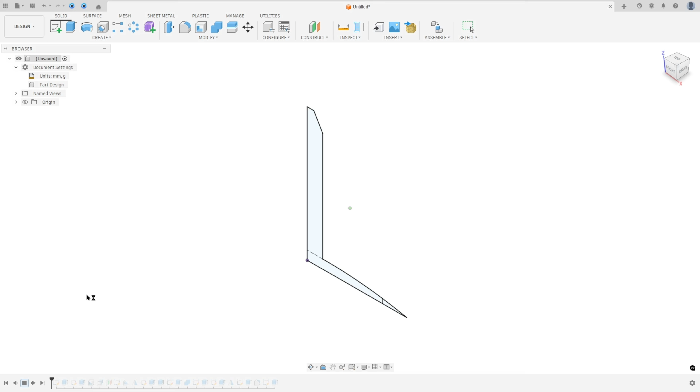Let's try one more challenge in Autodesk Fusion. In this video, you'll learn to use the Extrude, Shell, Press Pull, Offset Plane, Rib, Mirror, Combine, and Fillet. So open Fusion and let's go.

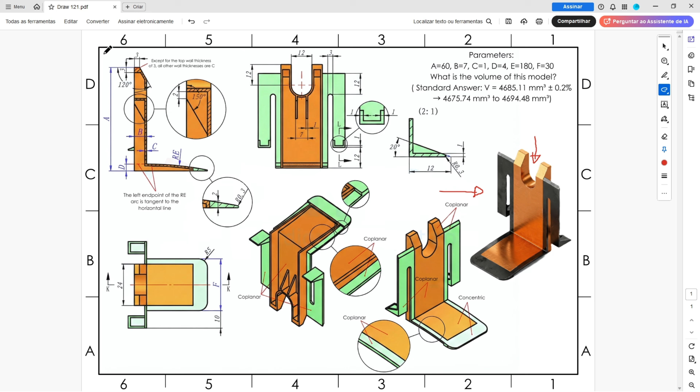The first step to create this part, we will make the orange body. So we will select the front plane and make this sketch. And here will be the midpoint. The first thing we'll make is this line here. Letter A, 60 millimeters of length. Create this line with 3 millimeters and create this line. The angle between this line and this line is 120 degrees.

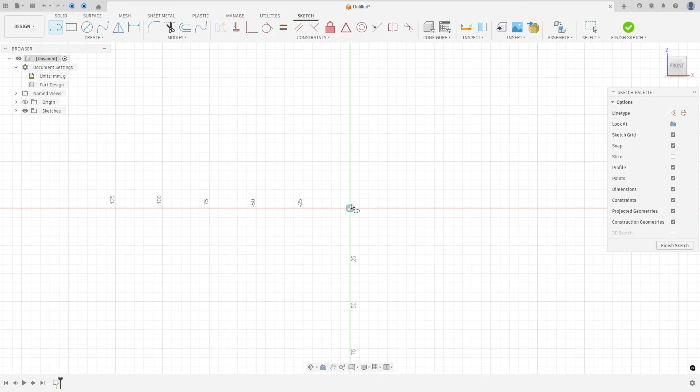So open Fusion, go to create a sketch, select the front plane, select a line, click here in the midpoint, 60 millimeters of length, 3 millimeters here, and make a line here. The angle here 120 degrees, and press OK. Let me move the dimensions here a little bit.

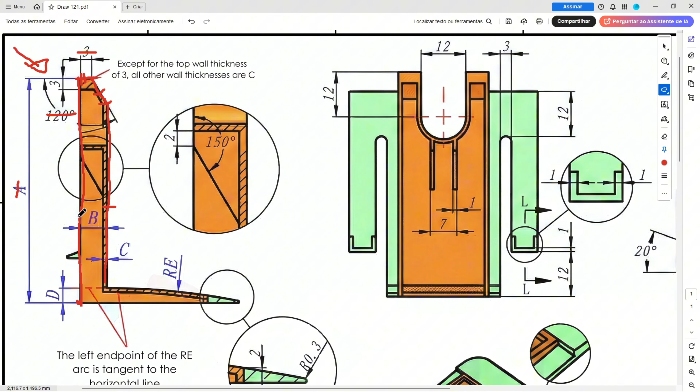And now we will create this line. The distance between this line and this one is letter B. It is 7 millimeters. So select a line, click here, make a line here. And go to sketch dimension, the distance here, 7 millimeters.

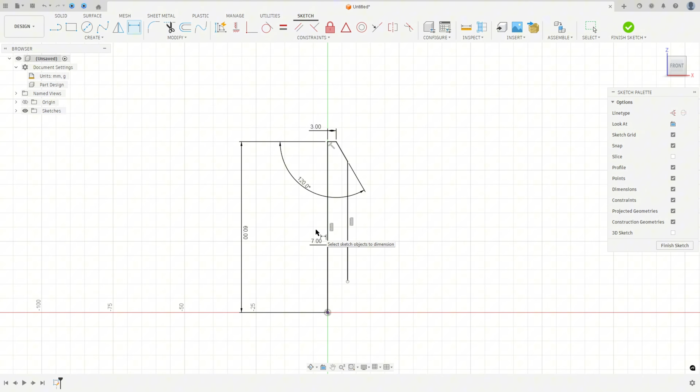And now we will create this construction line. The distance between this construction line and the midpoint is letter D. It is 4 millimeters. So select a line, a construction line, click here in this point and in this line, and go to sketch dimension. The distance here, 4 millimeters, and press OK.

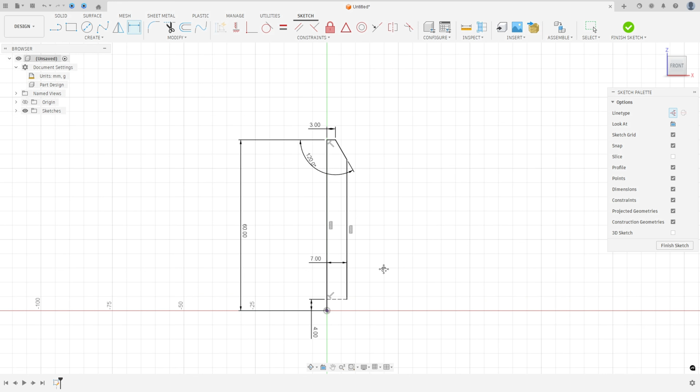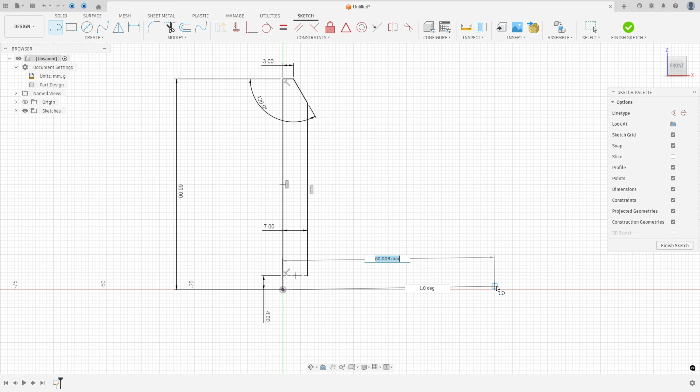And now we will create this line here, and we will create this arc. This arc is tangent with this line and coincident with this line here. So select a line, click here in this point, remove the construction line type, make a line here, and go to create, select arc, 3-point arc, click here in this point, click here in this point, make an arc here. This arc must be tangent with this line.

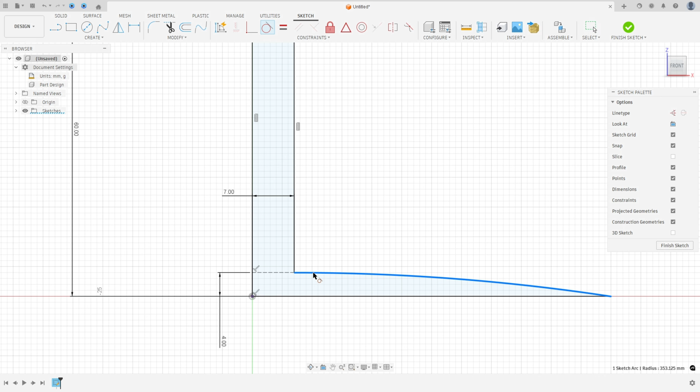If your arc is not tangent, go to constraint, select tangent, select the arc, and select this line. Okay? And go to sketch dimension. The radius here is 180 millimeters. And press OK. We made this profile here.

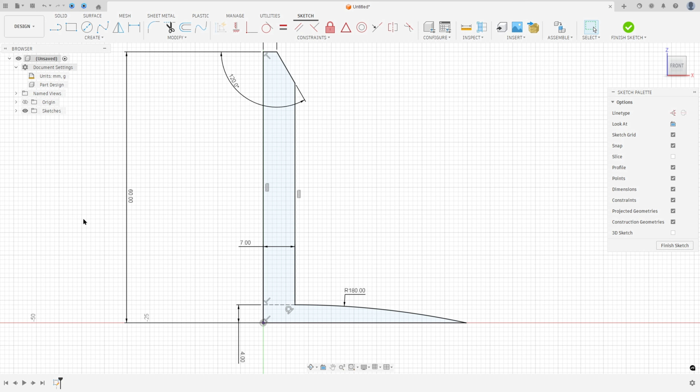But here, we needed to create this line. Look at this detail here. We will create this line with 2 millimeters because the orange body doesn't have this area. Okay? So select line, click on this line and click on this arc. Go to sketch dimension. The distance here, 2 millimeters. We made this profile here.

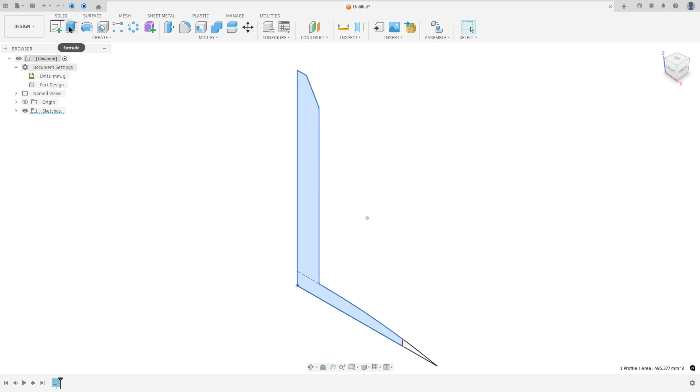So finish the sketch. We need to extrude this profile 24 millimeters. So go to extrude, select this profile. Make sure to not select this area. And the direction, select symmetric. Measurement, whole length, and the distance here, 24 millimeters. Operation new body and press OK.

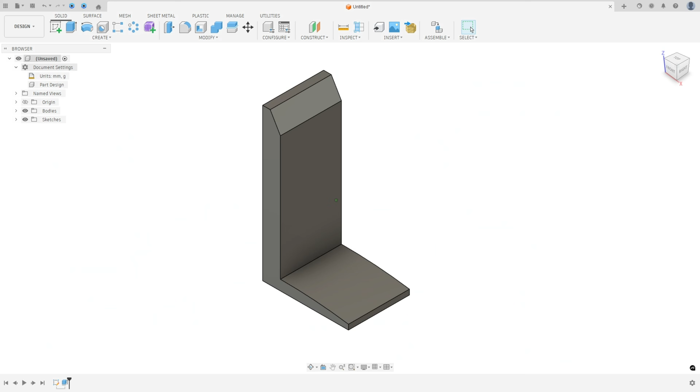And now we will create this cut here. It is a slot, 12 millimeters here. And the distance between this edge and the center of the slot is 12 millimeters. So let's create this sketch. Go to create a sketch and select this face here. Go to create, select project, include, project, selection filter, body, select this body and press OK.

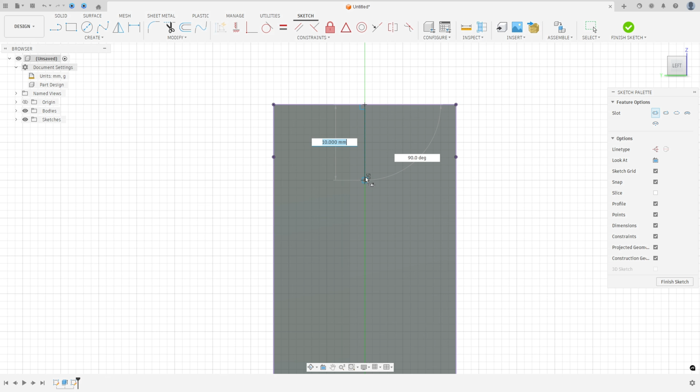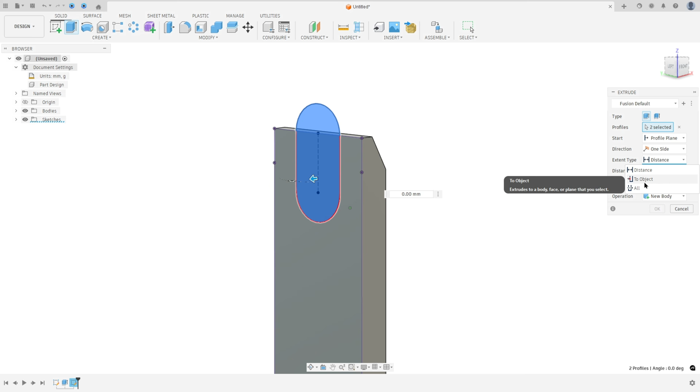And go to create, select slot, center to center slot. Click here in this point and make a slot here. Go to sketch dimension, the distance here 12 millimeters, and the diameter here is 12 millimeters. Now finish the sketch and go to Extrude, select this profile, and the extent type, select all and flip the direction, operation cut, and press OK. We made this one.

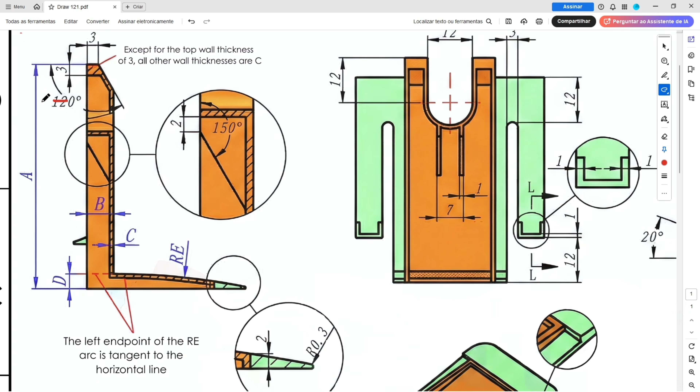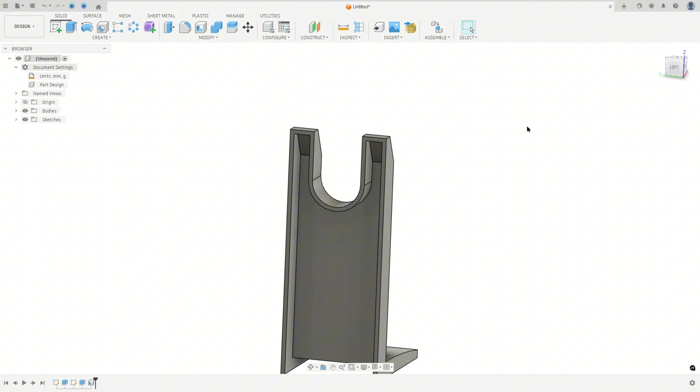And now we will shell this body. The thickness of this body is letter C. It is 1 millimeter. Except for this area, all the thickness is 1 millimeter, okay? So go to shell, select the faces that we will remove, this face and this face here. The thickness here 1 millimeter, and press OK. Just to check the dimension here, this face and this face, 1 millimeter, but here is 3 millimeters.

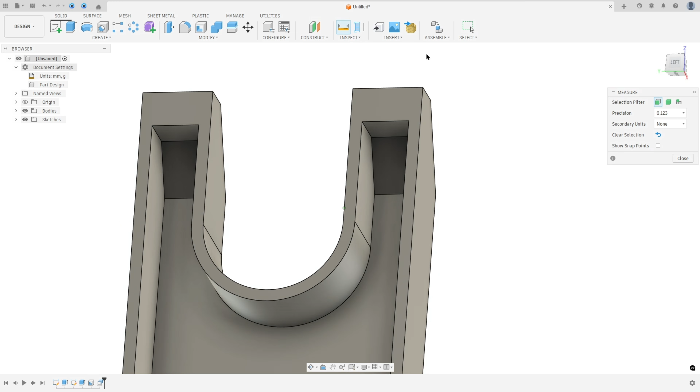So to create this, go to modify and select press pull and select this face and this face. The distance here 2 millimeters, and press OK. Just check the dimension, go to measure, select this face and this face. The distance here must be 3 millimeters on both sides, okay? 3 millimeters, and okay.

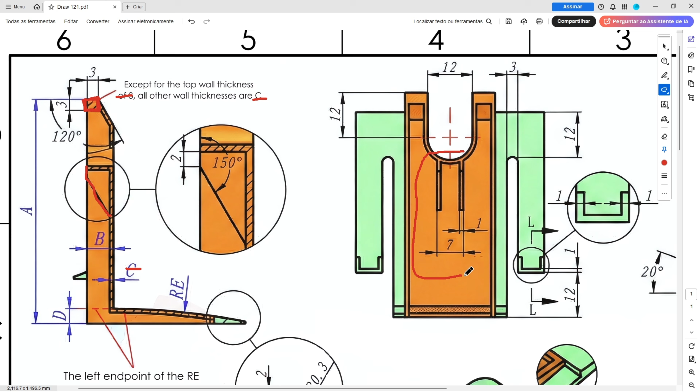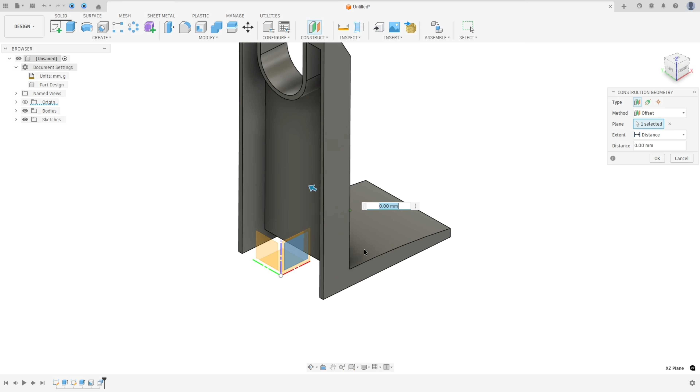And now we will create this rib here. To create this rib, we have the sketch here, okay? We will create a plane at this line. We know the distance between this edge and this edge is 7 millimeters, minus 1 and minus 1 of the thickness. The distance here is 5 millimeters. So we will create an offset plane from the right plane, 2.5 millimeters, okay? So go to offset plane, select the right plane, the distance 2.5 millimeters, and press OK.

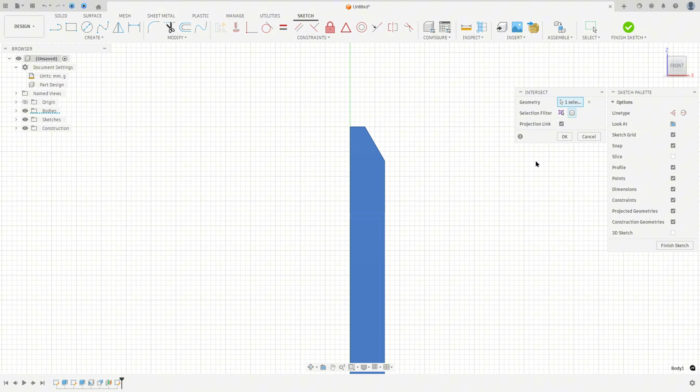And go to create a sketch and select this new plane. Go to create, select project include, intersect, selection filter, select the body, select this body here, and press OK. I will hide this body a little bit.

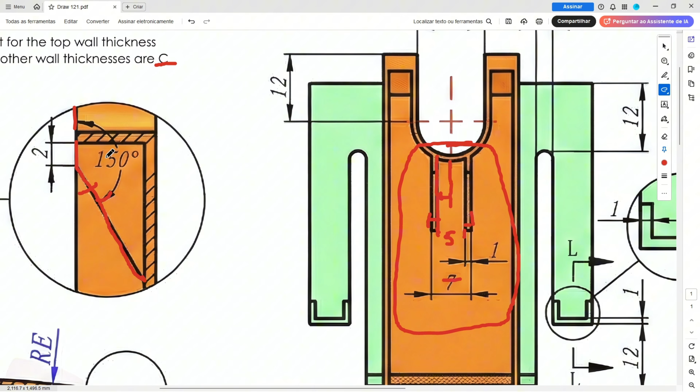And here we will create this profile, a line here with 2 millimeters of length and another line here. And the angle between this line and this one is 150 degrees. So select line, click here in this point, make a line with 2 millimeters and create another line here. And the angle here is 150 degrees.

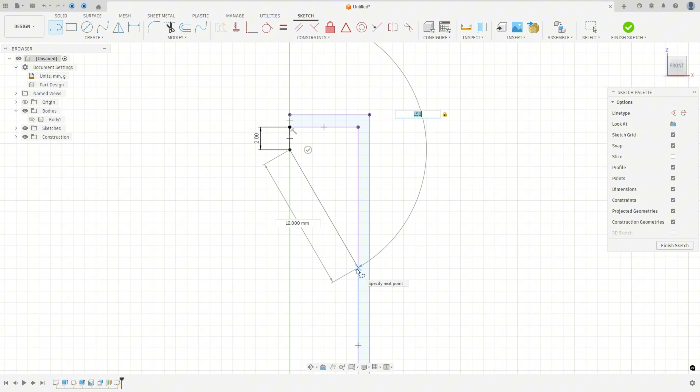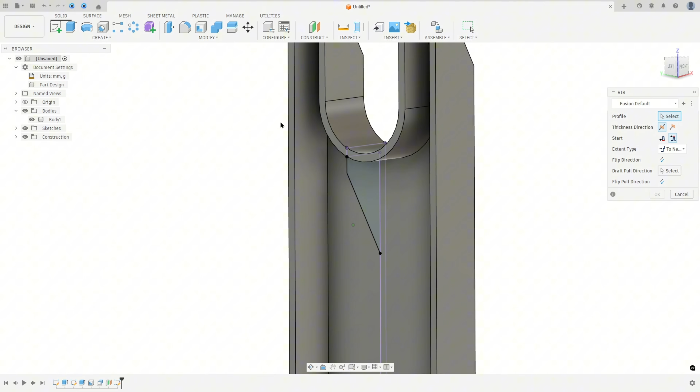And make this line coincident with this one. We made this profile. So finish the sketch. Show the body one here. And here the thickness of this rib is 1 millimeter. So go to create and select rib. Select this profile, 1 millimeter. But here the thickness direction, select one side. It must be to this side, okay?

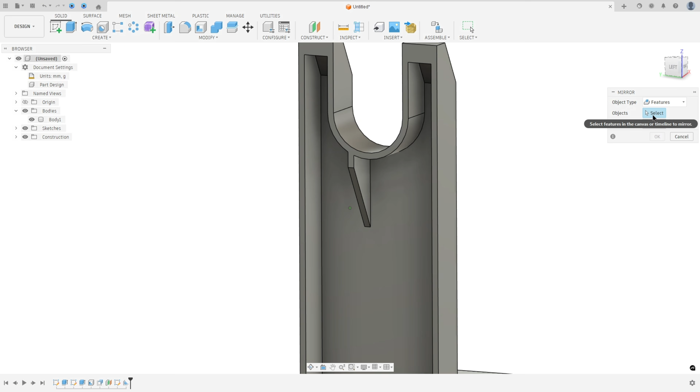And press OK. And now to create the other one, go to create, select mirror. And the object type, select features. The object, select this rib. And the mirror plane, select the right plane. And press OK. Go to inspect, select measure. Select this face and this face. The distance here must be 7 millimeters. And the distance inside here, 5 millimeters. Okay.

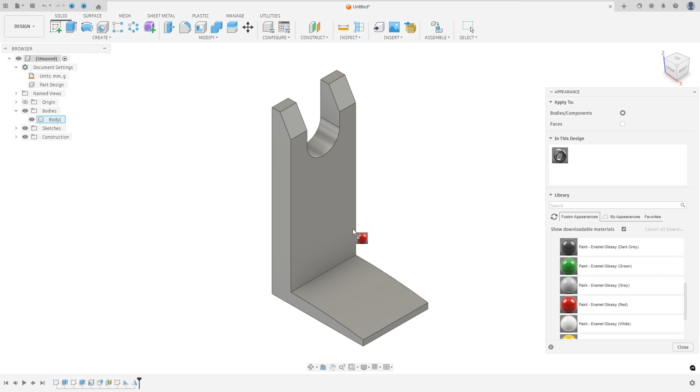And now press letter A on the keyboard. We will change the color here. So go to paint, enamel glossy, select red here, move this to this body. Double click here on this color, change the color. Make this orange. Okay.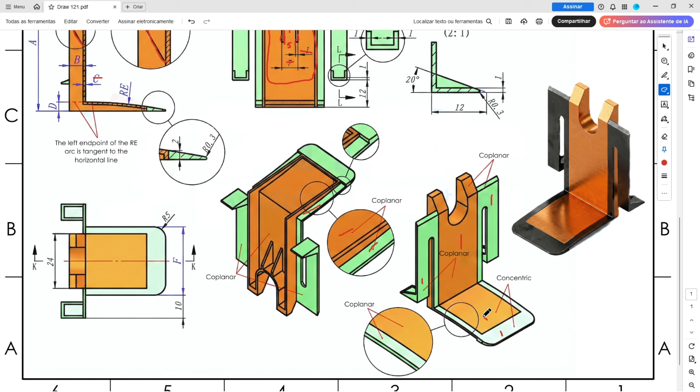And now we will create the body 2. And the body 2, look that it is coplanar with the body one, the face is okay. And here is concentric, the same arc. So we will create this sketch here. And we know that the wall thickness is 1 millimeter. So to create this, go to create sketch and select this face here.

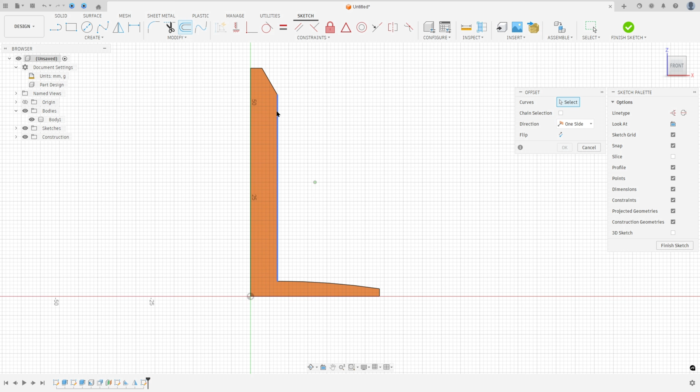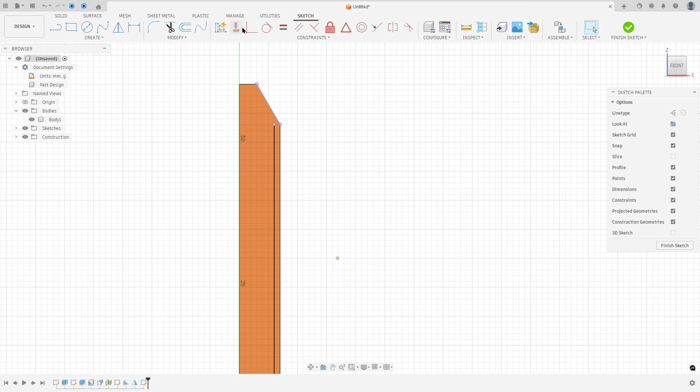And here, go to offset, remove the chain selection, select this line and select this arc, minus 1 millimeter, the thickness of the body, and press OK. And go to create, select project, include, project, selection filter, select specified entity, select this edge here and press OK. And go to constraint, select coincident, select this line and this one.

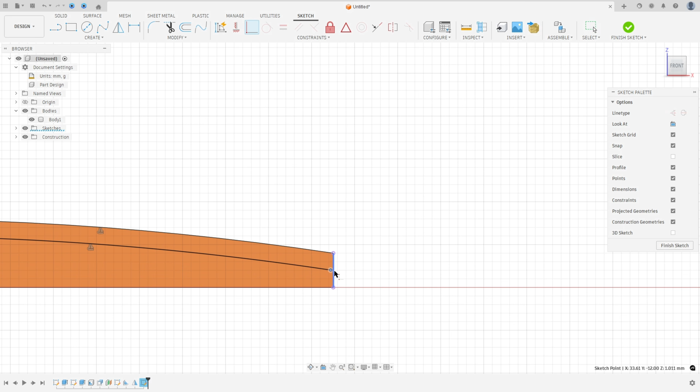And here we will make a project of this face. Press letter P on the keyboard, select this edge here and press OK. Make this point coincident with this edge. And here we will create the arc of the sketch 1. Okay, you can take a project here too, no problem. And press OK. Hide the sketch 1. We have this profile.

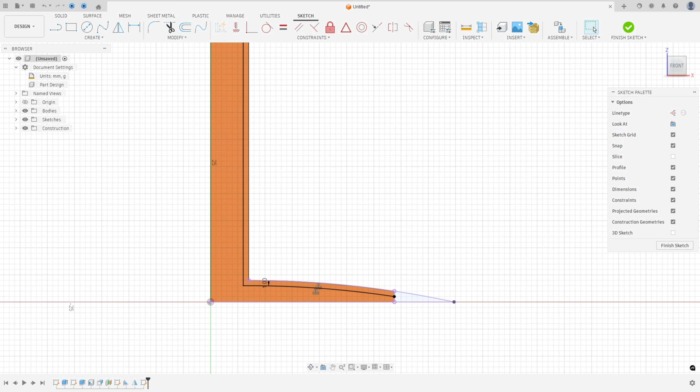And here we'll make a line. And this line will be here. And the distance between this line and the midpoint here is 12 millimeters. So select line, make a line here, go to sketch dimension. The distance between this line and the midpoint is 12 millimeters. We have this profile, this area, and this area here.

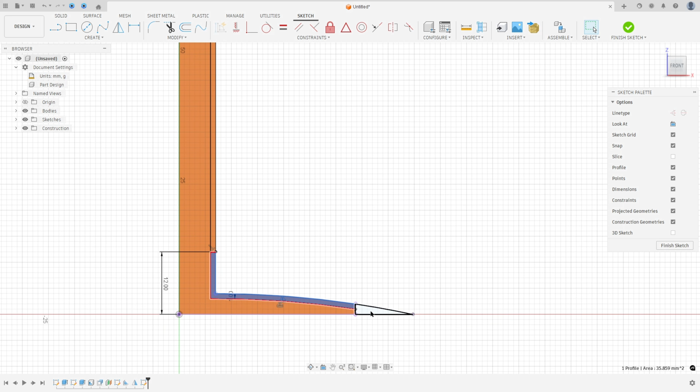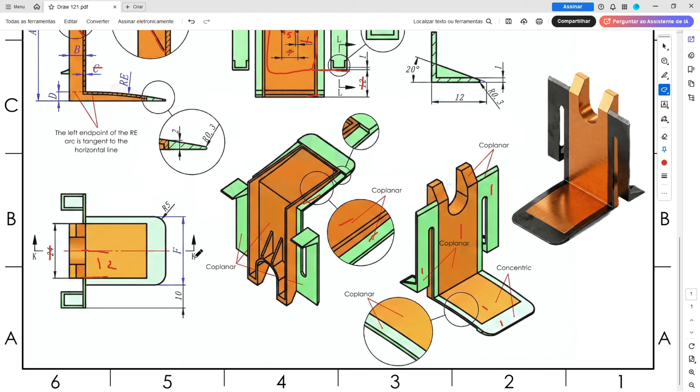And now finish the sketch and go to extrude, select this area here, this area. The operation here will be new body, and the distance here will be 24/2. The distance between this line and this line here is 12 millimeters. The letter F is 30 millimeters, so the distance between this edge, this line, and this edge is 15 millimeters.

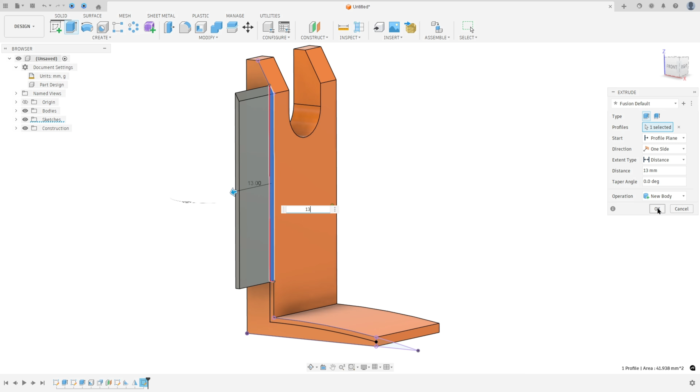So we have 3 millimeters, the distance between this edge here and this one, 15 minus 12. And the distance between this line here and this edge is 10 millimeters. So we will extrude this 13 millimeters, okay? The distance between this edge here and this one. So the distance here, 13 millimeters, operation new body, and press OK. And show the sketch 4 again.

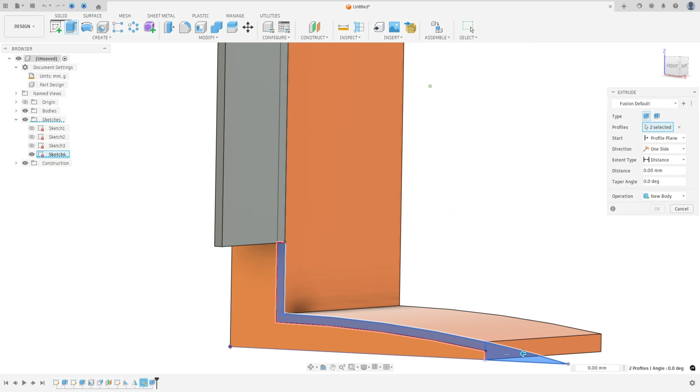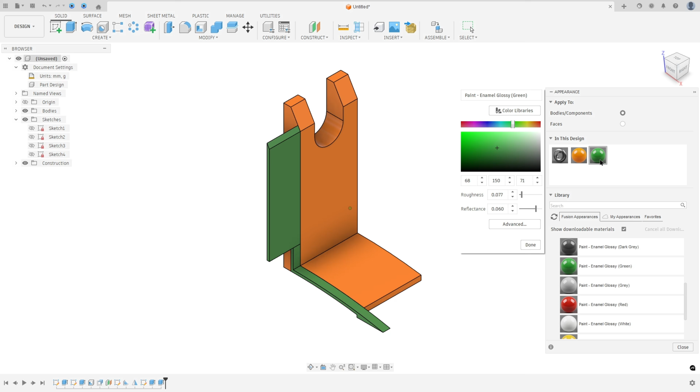Go to extrude and select this area and this one. And the distance here will be 3 millimeters, the distance between this line and this one. The distance here, 3 millimeters, okay? The operation here, new body. And press OK. Hide the sketch 4. Made this one. Press letter A on the keyboard, change the color here. Make this green. Okay.

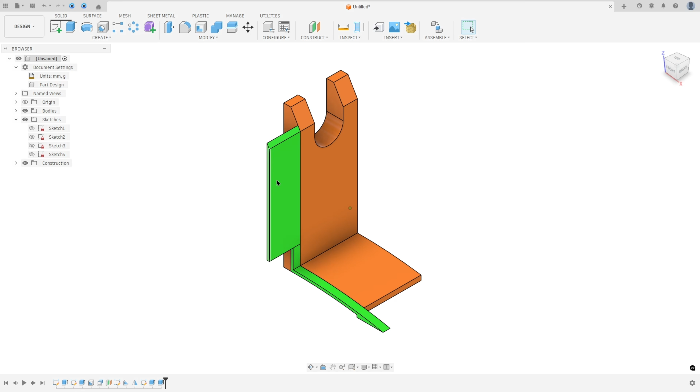And now we will create this cut here. So this cut is a slot. The diameter here is 3 millimeters. The distance between the tangent point here and this edge is 12 millimeters. And this line here is collinear with this face. Okay. So select this face and go to create sketch.

And here go to create, select slot, center to center slot, make a slot here, go to sketch dimension. The radius here is 1.5 millimeters. The distance here, just to check the dimension, 3 millimeters, okay, the diameter.

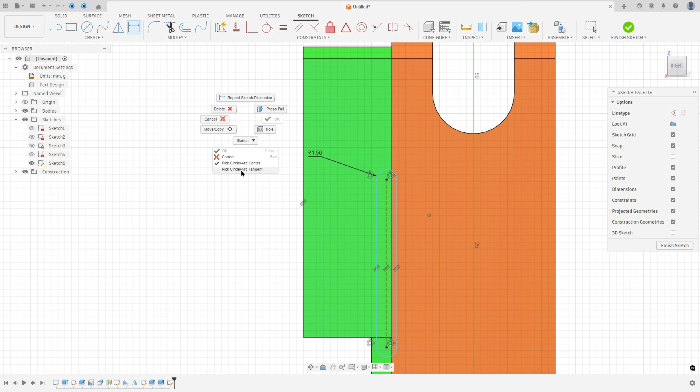And go to dimension, click with the right button and select pick circle arc tangent, select this arc here and select this edge here, or select this edge first and click with the right button, select pick circle arc tangent, select this arc here, the distance here 12 millimeters. And let me move the dimension here a little bit.

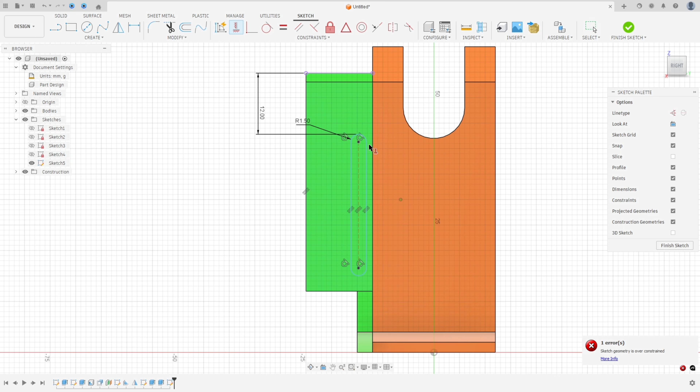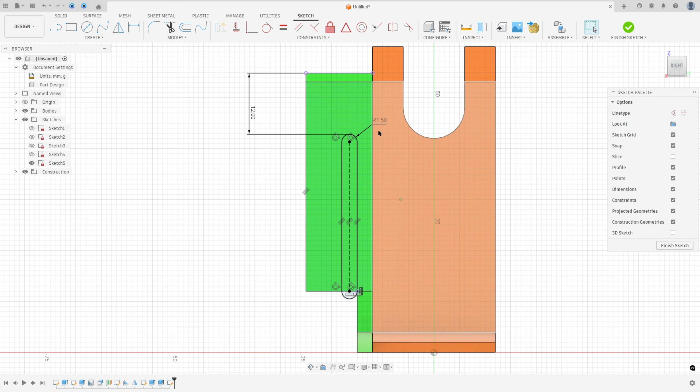And here go to constraints and select horizontal/vertical, select this point and this point here. No, sorry. So go to horizontal/vertical, select this point and this point here, okay? And make this horizontal/vertical here. We made this profile. So finish the sketch, go to extrude, select this slot here. The extent type, select all, flip the direction, operation cut, and press OK.

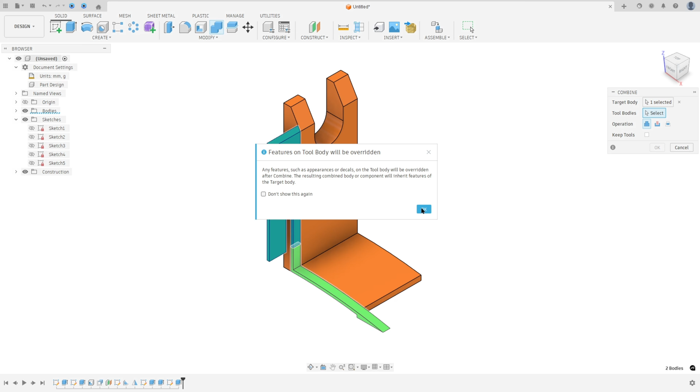Now go to modify, select combine, select this body and this one, press OK. Operation here, join, and press OK. Look that we have the body 1 and body 2 here, okay?

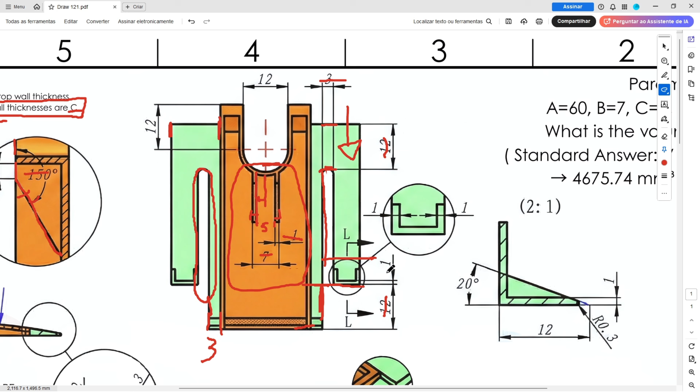And now in this body here, in body 2, we will create this sketch. We'll make this triangle, 12 millimeters, and the angle here 20 degrees.

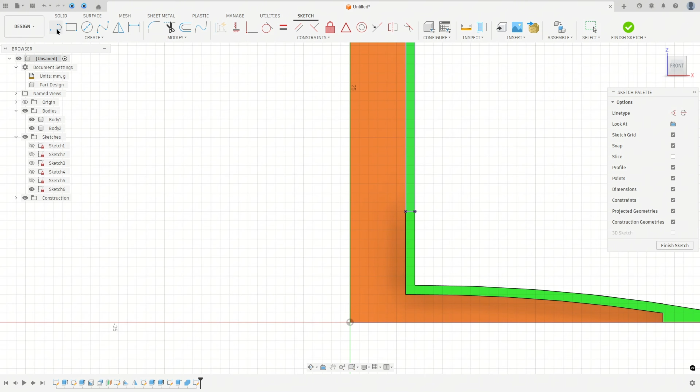Go to create a sketch and select this face here. Press letter P on the keyboard, select this face, and press OK. Select line, make a line from this point here with 12 millimeters, and make the triangle here.

The angle is 20 degrees. Make sure that this point here is coincident with this line. And in the corner here, we have an arc with 0.3 millimeters of radius. Go to fillet, make a fillet here, 0.3 millimeters, and press OK.

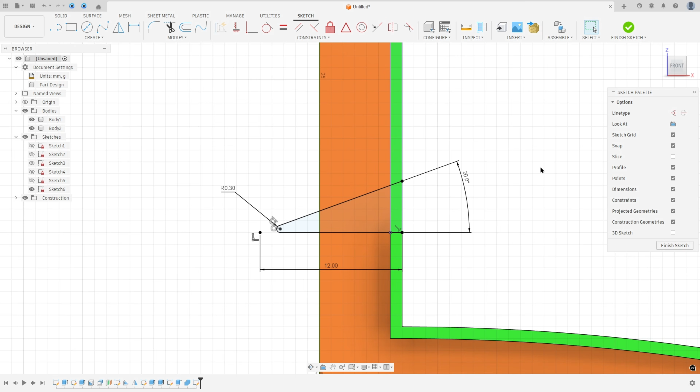We made this profile, so finish the sketch. Go to extrude, select this profile here, the extent type select to object, and the object select this face. Operation join, press OK.

Now we need to create a cut in this area. To create this cut, we'll make a rectangle. The distance between this rectangle and this edge is 1 millimeter on this side, and in the bottom is 1 millimeter, okay?

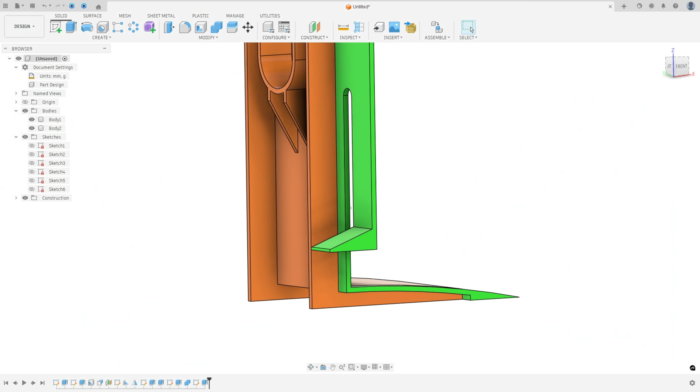Go to create a sketch and select this face. Go to create, select project include, project, and select this face, or select this body, okay? The body 2, and press OK.

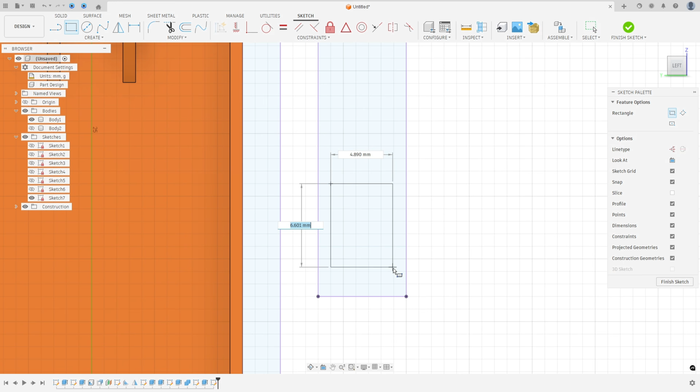I will hide this body a little bit and go to 2-point rectangle, make a rectangle here. Go to sketch dimension: the distance here 1 millimeter, the distance here 1 millimeter, the distance here 1 millimeter. And here just to fully constrain this sketch, we use 10 millimeters here, okay?

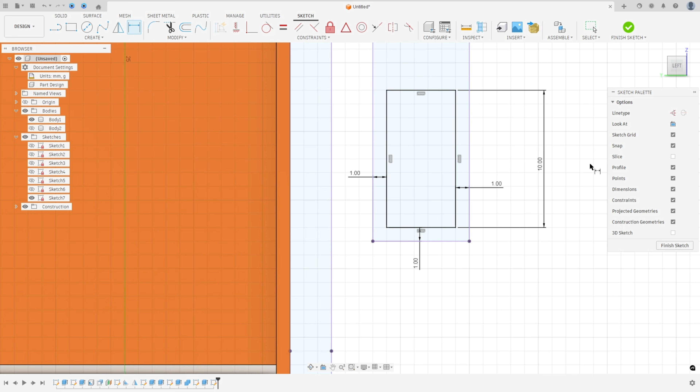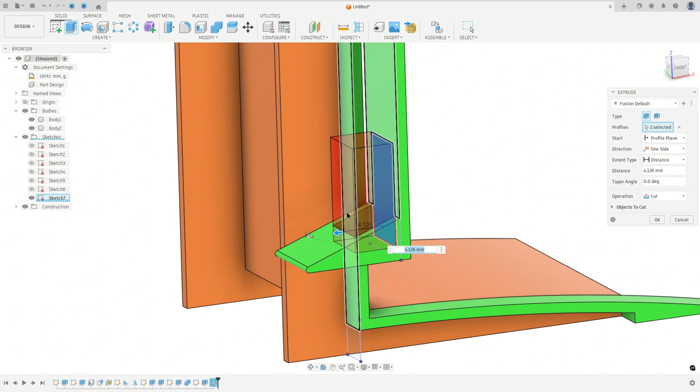Finish the sketch, go to extrude, select this rectangle, show body 2. We will make a cut here, so the extent type select all, flip the direction... we don't need to flip. It's not working with this extent type, so select distance and move this 15 millimeters. Operation cut, press OK. We made this cut here, okay.

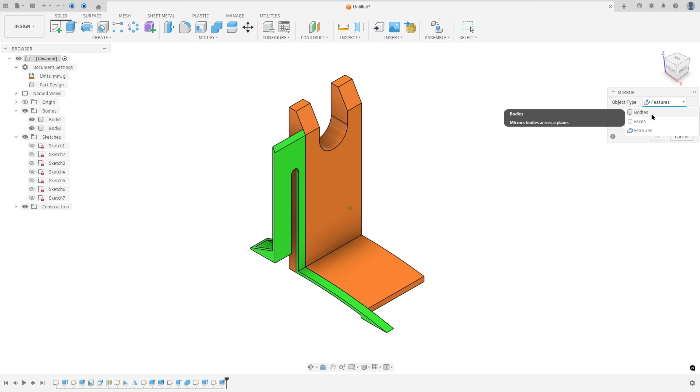And now we will create this body on the other side. Go to create and select mirror. The object type, select the body, select this body here. The mirror plane, select the front plane, operation new body, and press OK.

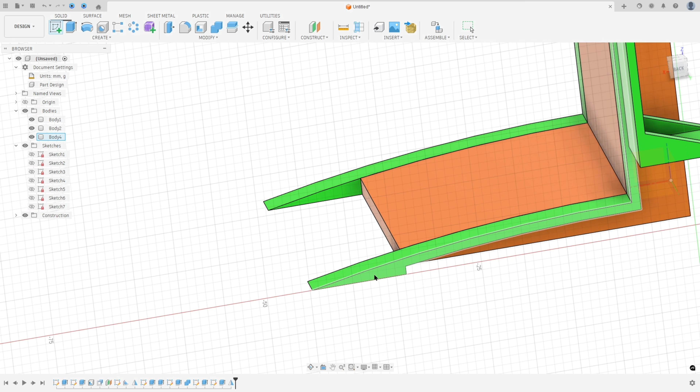Now we'll make an extrusion to create this area. Go to create a sketch and select this face here or this face here. Go to create, select Project/Include, Project, select this face, and press OK. And select a line, click here at this point, make a line here coincident with this arc.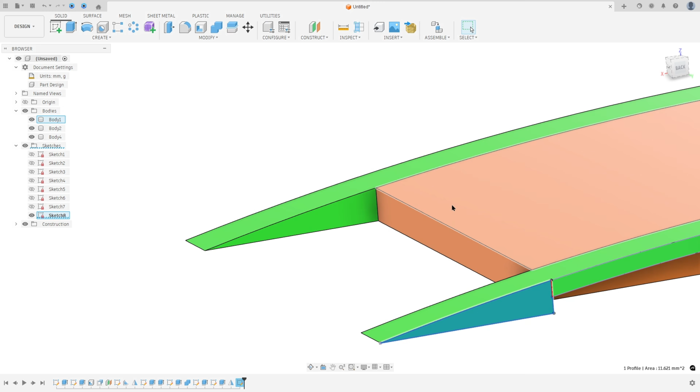So we have this profile, finish the sketch, and go to extrude the direction here, one side, the extend type to object, the object select this face here. The operation here is join, but remove body 1 here, and press OK.

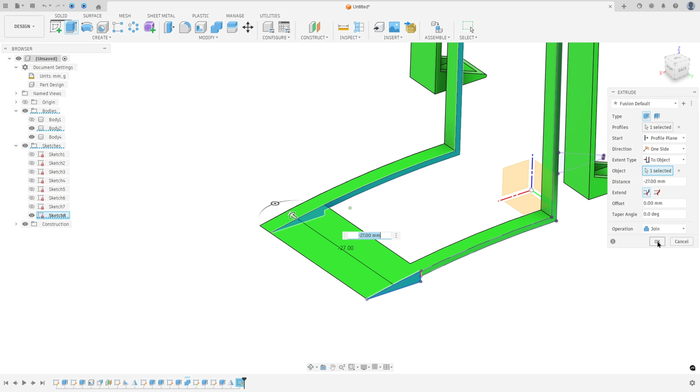We have body 1 and body 2 here. And now we will make this fillet here. This fillet is 0.3 millimeters.

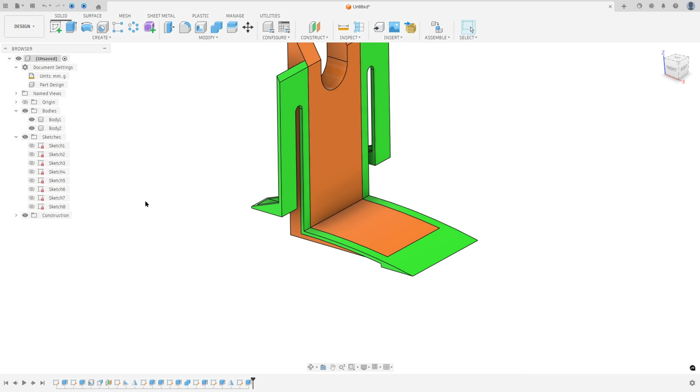So go to fillet, select this edge here, the fillet here 0.3 millimeters, and press OK. And now we have a fillet, this fillet here.

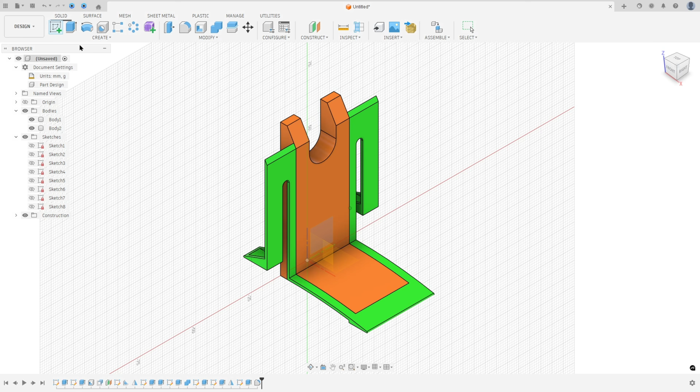But to create this fillet, we'll make an extrusion cut, to cut this area in both sides, okay. So go to create a sketch and select the top plane. And here go to create, project include, project, select this body here, and press OK.

And here go to create, select the arc, 3-point arc, click here on this line. Let me hide this body a little bit. Click here on this line and this one, make an arc here and make another arc here. Go to constraint, select tangent, make this arc tangent with this line and tangent with this line.

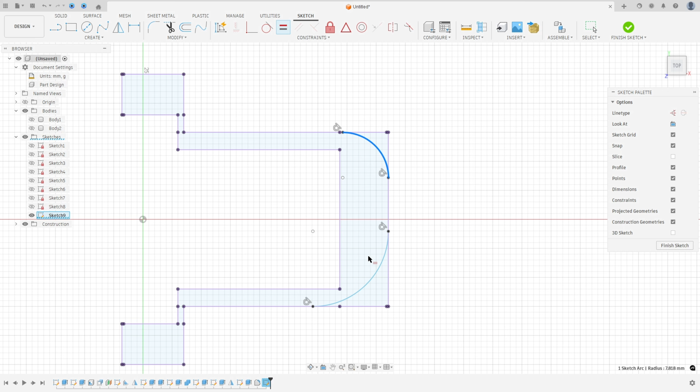The same here. And go to constraint, select equal, select this arc and this one. Go to sketch dimension, the radius here is 5 millimeters.

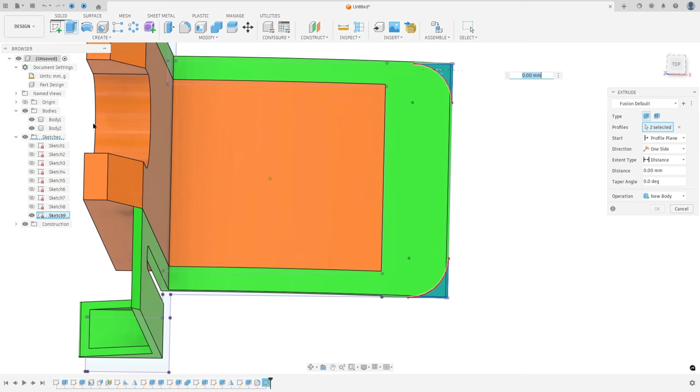Now we have this area and this area. So finish the sketch, go to extrude, select these two areas here, show the body here, and the extend type select all. The operation here is cut, press OK. We made this one.

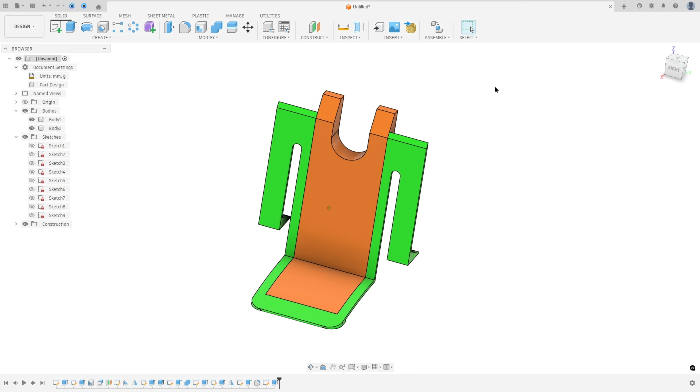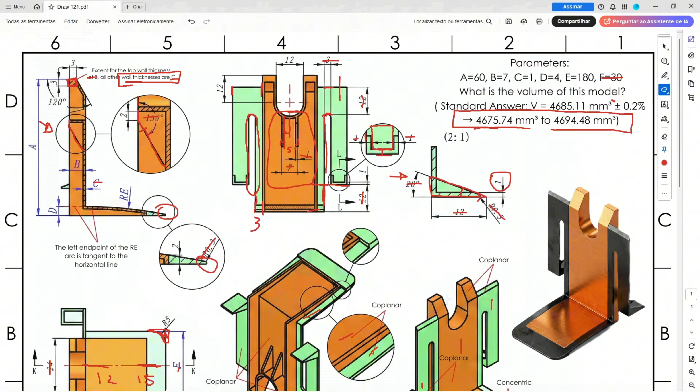Click here with the right button and select property. And the volume is here. It is inside of this answer. So that's it, here we finish the exercise.